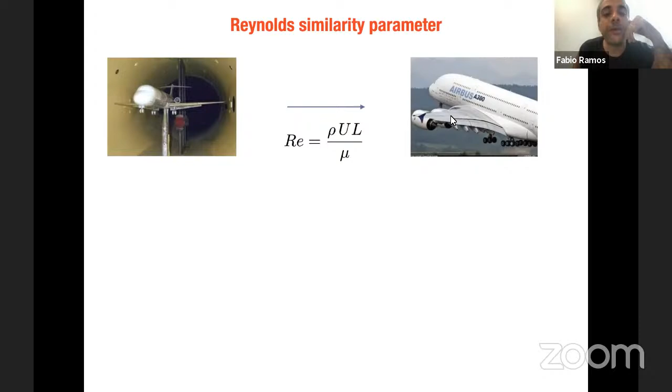And of course, as mathematicians, you know that you can normalize the Navier-Stokes equation in such a way that, in the dimensionless variables, the 1 over Reynolds shows up here. And it's natural to believe that when Reynolds is really, really high, then the effects of the Laplacian, the diffusive effects, is small.

And then you'd approach something similar to Euler, something more inertial than diffusive. But that's...

elusive, because if you're working with incompressible flows, you know that you have non-local behaviors. And especially if you are in the presence of boundaries, working with the more used boundary condition, the no-slip boundary condition, u equals 0, you know that you cannot really ignore this effect.

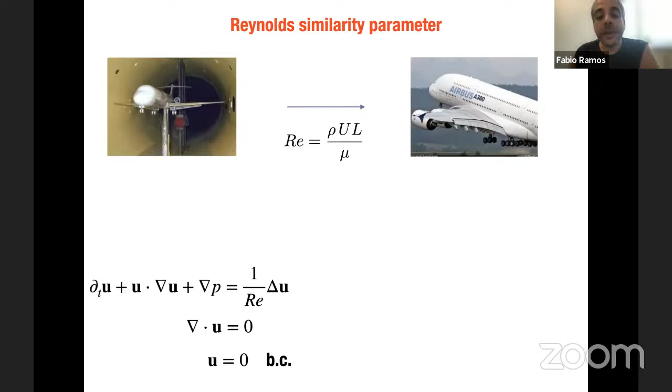This is a picture from a simulation of Lee, Moser, and Malaya. It shows that the velocity profile, the colors are related to the velocity profile intensity and velocity fluctuations. You see that near the wall, the physical behavior is very different than the core region.

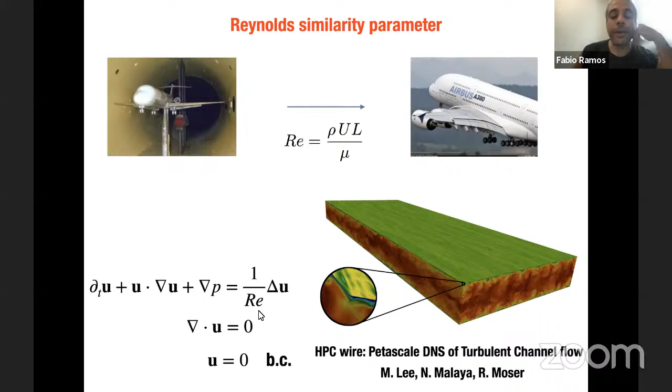And this kind of thing is the reason that you cannot really ignore it, cannot take the limit straight. You have to be very careful.

The Reynolds number, as you know, is the control parameter of turbulence. For a small Reynolds number, you have some laminar flows, and then you increase the Reynolds number, you see some transition. The transition can be seen through structure changes.

And then you have this transition to turbulence. People used to think of two types of flow, laminar and turbulent. That's it. Once you reach turbulence, you have the turbulence world, one single world, and you just have to deal with that world.

So here are just some orders of magnitude. A whale at 10 meters per second is 300 million Reynolds. Duck flying is 300,000. Human swimming is 10,000. It's good to have this order of magnitude.

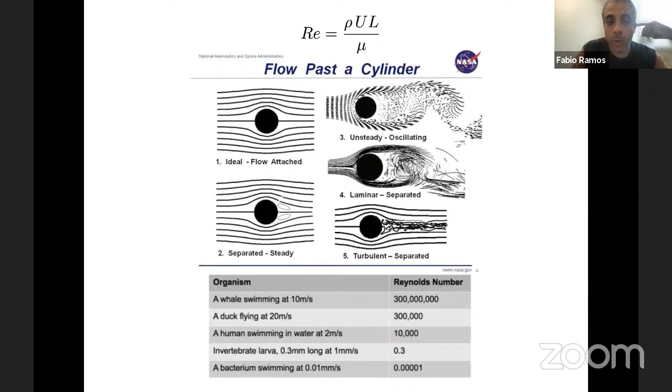So we are used to work either with the laminar flow or the turbulent flow, having these two worlds. But what I'm showing here today is that actually you should consider three worlds at least.

This is a work published last year in Physics of Fluids. We show that for a small Reynolds number, the friction factor, I'll define everything here today, scales with 1 over Reynolds, and the wall shear stress scales with mu, u bar, which is the bulk velocity, over delta, the radius of the pipe. And this wall shear stress yields this friction factor.

Then you have some transition to turbulence, and the wall shear stress scales with rho, u bulk, u eta, where u eta is the Kolmogorov velocity. The friction can be written as this ratio of Kolmogorov velocity to the bulk velocity, and this gives the Blasius range, the one over Reynolds to the 1/4.

People usually thought of the Blasius range as some empirical correlation, not very physical or mathematical. But recently we learned that there is some physics behind this scaling.

And then there's some crisis here, some other transition, a late transition, and then you have this transition to another scaling where the wall shear stress scales with rho, U bulk, and UM, where UM is the mesolayer velocity.

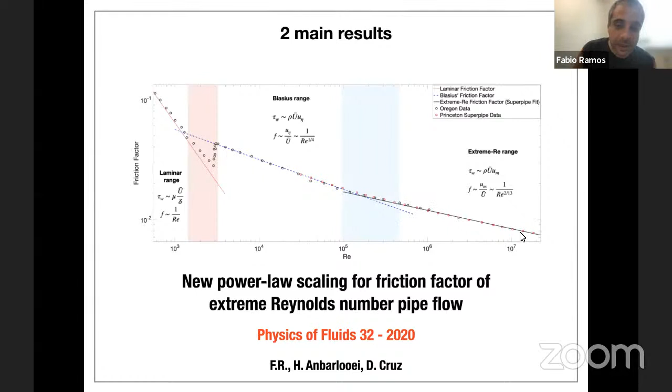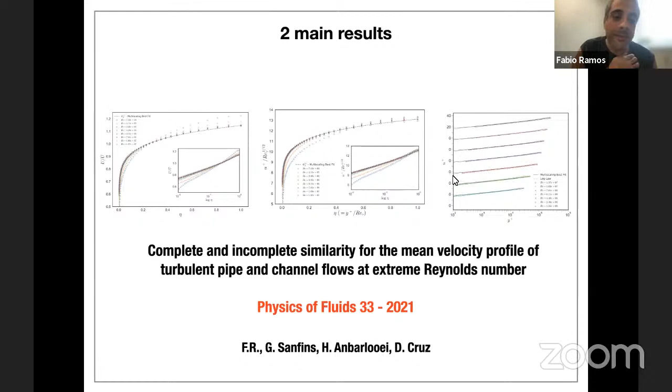And the other result is some more corroboration that this is true, that you have a secondary transition to turbulence. So when Reynolds is very, very large, we will show that there is a transition, that the mean velocity profile collapses into one singular self-similar profile, when you scale with the bulk coordinates. And this will be related to some incomplete similarity notion, which is not very discussed in the Western literature, but the Russians know very well. And then you can move to the usual wall scaling of the mean velocity profile. I'll define everything here.

Okay, so I'll start advertising this very nice book by Barenblatt, Scaling. So much of the concepts I will discuss here, not in the context of fluids, it's there. There's some in the fluids also there.

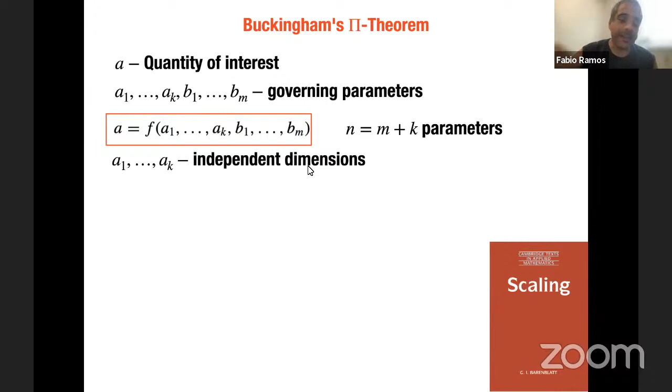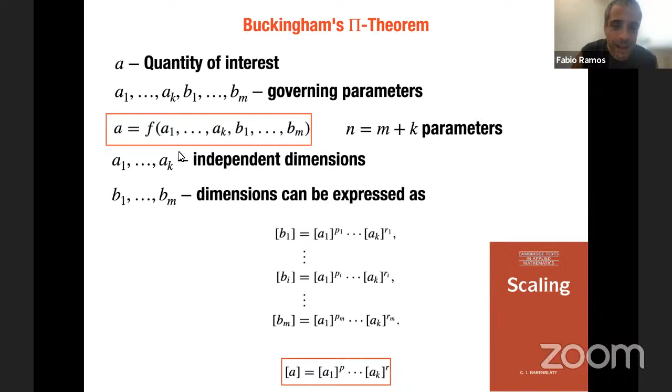So I'll start with the Buckingham pi theorem. If you have a physical quantity of interest, A, and some governing parameters, such that A is a function of these parameters, you have n parameters, but you divide these parameters such that the A's have independent dimensions, like mass, time, mass over length, stuff like that. But the B's, they have dependent dimensions. The dimensions of B can be expressed as products of powers of the dimensions of A, as well as the quantity of interest itself. So the A1 to Ak are the independent ones, they have independent dimensions.

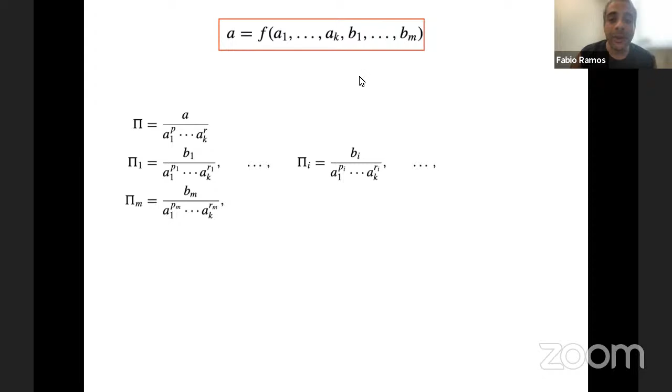So what the Buckingham pi theorem says is that if you have a physical relationship like this, you can normalize these variables. The A's you can normalize, the B's you can also normalize, such that you have these dimensionless parameters, and you have some generalized homogeneity property. This is modeling 101.

So you can always write this physical function F like that, as you take the A's out, and you have only the dimensionless parameters inside the phi, and then you can rewrite the physical law in dimensionless variables. So this is the pi theorem. You can always write a physical law in a dimensionless form, which is obvious. So this is Buckingham's pi theorem.

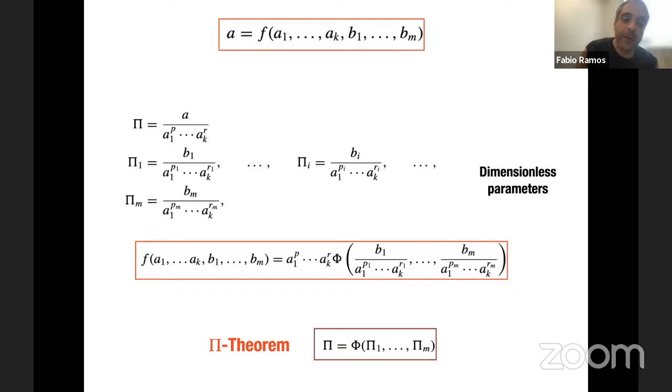The Buckingham pi theorem yields some similarity group of transformations such that you are free to multiply the independent parameters by positive numbers, capital A's. And if you change accordingly the dependent parameters and the physical quantity of interest, then the generalized homogeneity still holds. So you have this invariance through this K parameter group. So you're free to choose units, if you change things accordingly.

Let's go to the friction factor of fluids. So you have a flow flowing through a pipe, and I'm considering that I'm far from the inlet and the outlet, and this is statistically stationary, and this flow is driven by a pressure drop. The pressure here is higher than here. So the dimensions of pressure drop are like this: mass, length, time. The bulk velocity like this, pipe diameter, density, dynamic viscosity.

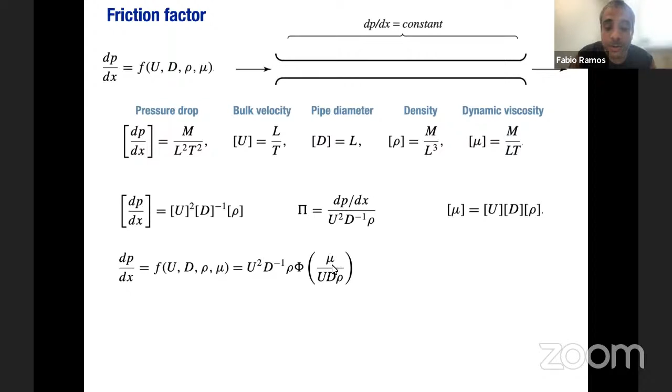You can rewrite the dimensions of the pressure gradient like this, so that you can form a dimensionless parameter like that. The dimensions of mu can be written like this, so that by the Buckingham pi theorem, the pressure gradient, using the generalized homogeneity, you can take out these guys and have just a function of this dimensionless parameter. And this dimensionless parameter is actually 1 over Reynolds. So this is Reynolds showing up here, the Reynolds number.

So if you write this dimensionless quantity called the friction factor, we know that this friction factor is a function of Reynolds. The friction factor is the single most important quantity in engineering applications in fluid mechanics. That's what determines the design of piping systems in several applications. So it's really, really important to understand the friction factor for different flows.

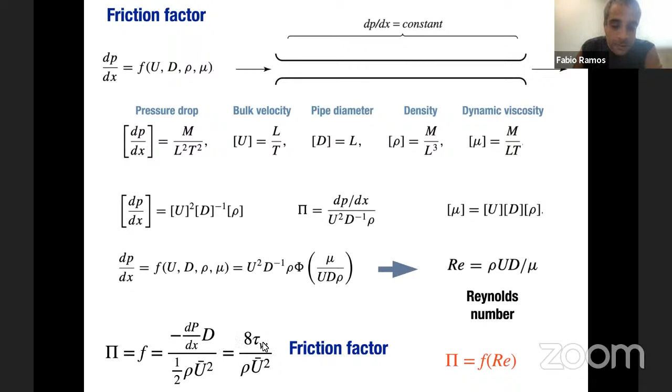Because it's very important, people know a lot about that. This tau W shows up here - this is the wall shear stress. I will show now how it appears in the friction factor formulation.

Let's assume you have a channel flow driven by a pressure gradient. You have a constant pressure gradient if you have statistical stationary solutions. This is the total shear stress, this is the viscous stress, this is the Reynolds stress. In the fluid mechanics literature, people work a lot with these stresses.

But what is really important for our work is to consider the full second law of Newton - Newtonian mechanics. So you're not dealing with the stress itself, but with the gradients of stress. When you write this, this is the axial mean momentum equation. This is valid all over the channel, and this has dimensions of force, so this is balance of force.

So this is the viscous force, the force that comes from viscous imbalances, from diffusive imbalance. This is the force generated by Reynolds stress imbalance. And these forces are balanced by the pressure gradient force.

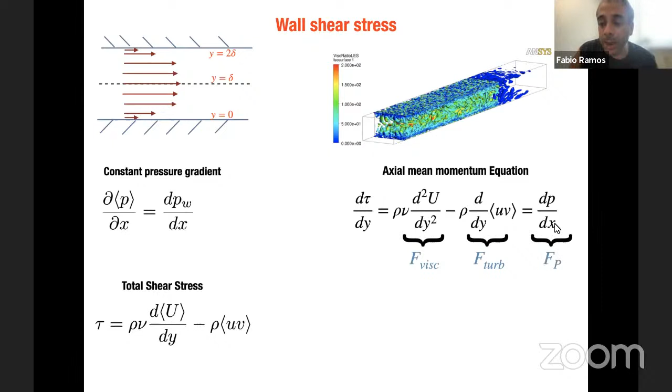If you integrate, then you know that the total shear stress at y, the distance from the bottom wall - this is y - has this linear relationship, and this coefficient here is the wall shear stress, the shear stress at the wall. At the wall, this is 0, so it's just the viscous stress at the wall.

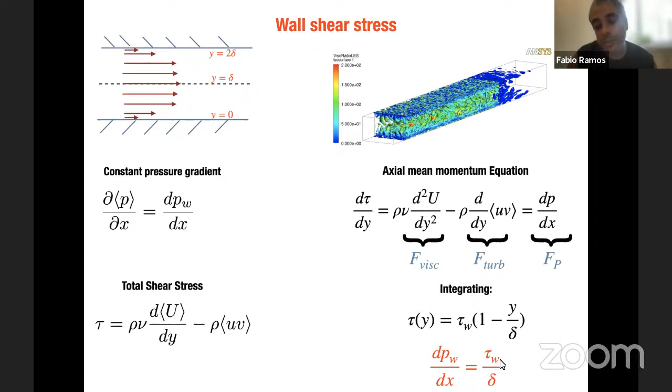And then using this relationship, you can prove easily that the pressure gradient is actually the wall shear stress over delta. That's the relationship between pressure gradient and wall shear stress. So to define a pipe flow driven by a pressure gradient, you have to define either the pressure gradient itself or the wall shear stress - that's enough, one replaces the other.

So that's why you have that the friction factor can be written like this with the pressure gradient or the wall shear stress. That's the definition of friction factor.

Already in 1911, Blasius assumed some special power law form for the mean velocity profile, and he showed by experiments that this friction factor scales like 1 over Reynolds to the 1/4. But after some range, after 10 to the power 5, Blasius correlation is not valid anymore - there's a limit for this law. And people always thought that the Blasius correlation is more like an empirical correlation with no physics behind it.

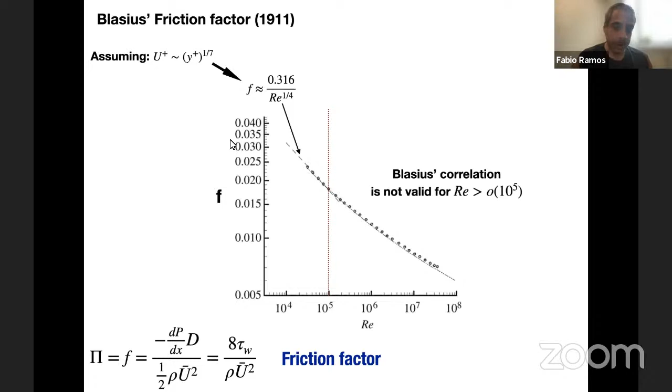In the 30s, about 19, 20 years after Blasius, Nikuradse did many experiments with smooth pipes, showing that really Blasius is no longer valid after 10 to the power 5.

But he also did many experiments with rough pipes. And depending on the roughness element size, the friction factor follows Blasius, but then there's a crisis, and then the friction factor goes to some constant. So when people discuss singular limits in fluid mechanics, a place where people really should look is rough pipes - you do have this constant friction, something happens that becomes constant.

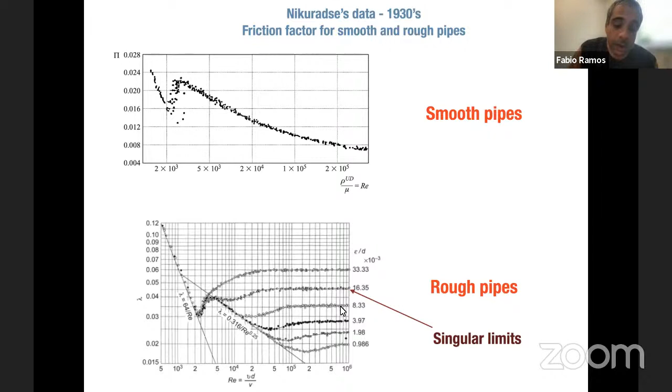Okay, so this is all about friction factor. Let's take a look here at some visualization of the turbulent channel flow by these guys from KAIST, from Korea. This is a really nice simulation. This is not very high Reynolds number, it's still in the Blasius range.

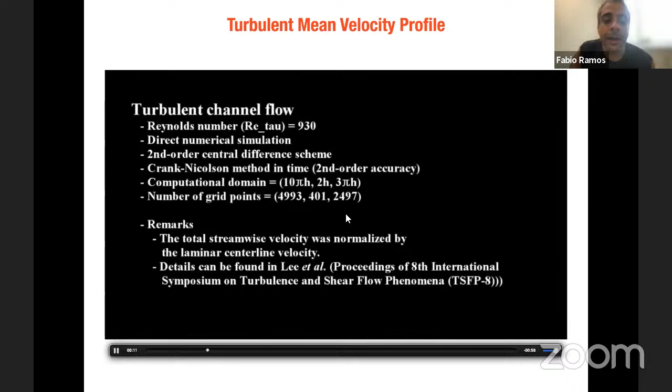And the velocity, the colors are normalized by the center line velocity, so you see that it's very fast here in the center line. Near the wall, this blue showing that is very slow, the velocity field. Of course, it's U equals 0 at the boundary, and then there's a transition layer.

This green area - take a look here at 0.5, halfway. It seems that some guys come from up and go down, down from the bottom, go up. You see some circulations here, you see some vortex.

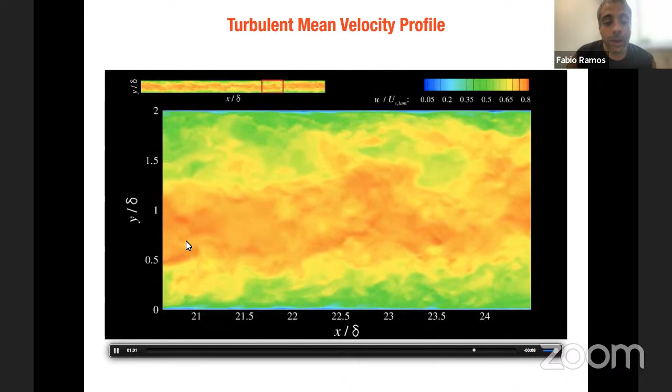So this is the usual thing that when you think about pipe flows, channel flows, you have this core region, you have the wall region, you have some intermediate range region. That's how people usually think of these pipe flows, so you have these different domains of the flow.

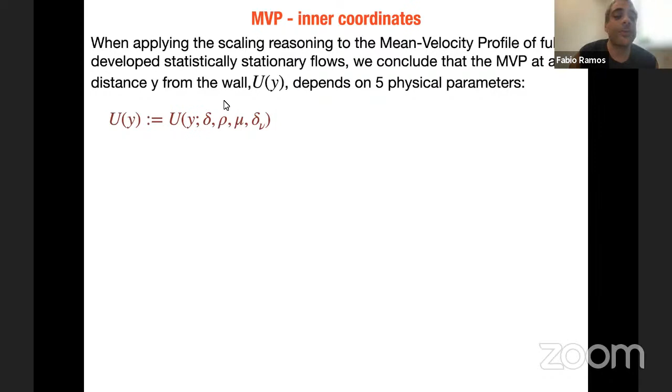So let's take a look at scaling of the mean velocity profile. The mean velocity profile is actually dependent on the pipe radius or half of the channel height, the density, the viscosity, and this quantity that I call delta nu. This delta nu is mu over rho over u tau, and u tau - this is the wall viscous length scale, the length scale that you should use in your rule to see things near the wall.

This u tau is the friction velocity, and you can form it with the wall shear stress, the square root of wall shear stress over rho. Remember, wall shear stress and pressure drop go hand in hand. So if you have pressure drop, you have wall shear stress, and then you have u tau, and you have delta nu. I could put here pressure gradient, u tau, or delta nu. I decided to put delta nu because it will be very important.

This idea comes from Prandtl, more than 100 years ago. He said, let's normalize the distance from the wall with delta nu. Let's look at using this wall unit delta nu, this is the y plus, and the velocity you should scale with u tau, the friction velocity. So these are the inner coordinates, the wall coordinates - the truth should reveal itself by looking with these glasses, right?

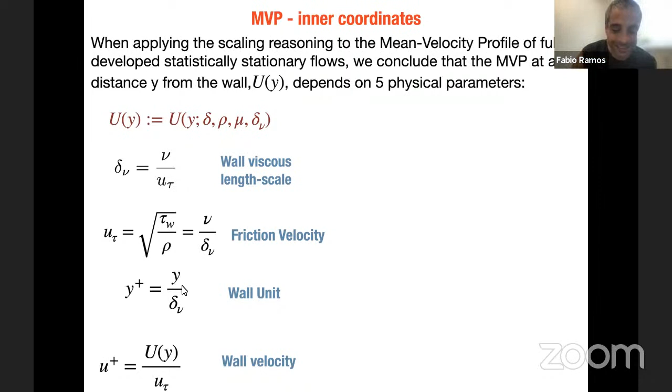This is what Prandtl thought. So this is the semi-log plot of u plus against y plus, and you see there's a linear region here. In the log, the linear looks funny, but it's a linear region. This u plus equals y plus, that's by definition of these coordinates. Then there's a region where there's a log law, some intermediate region that people call the log law region. People already knew you have some wall region, intermediate region, and core region, so that was natural. But the log law comes - this comes earlier - and then u plus is a function of y plus.

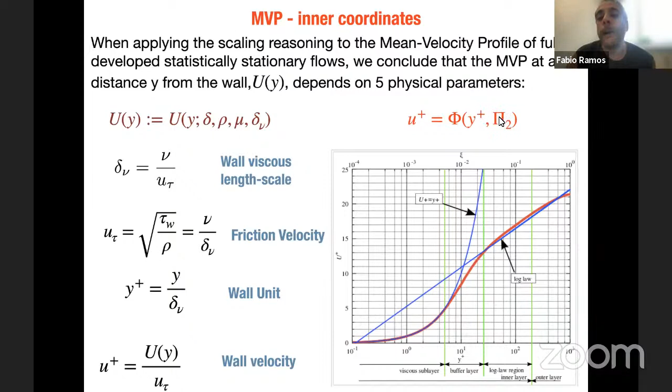But by the Buckingham pi theorem, you have the right to use another dimensionless parameter, pi 2, right? And it's open to discussion.

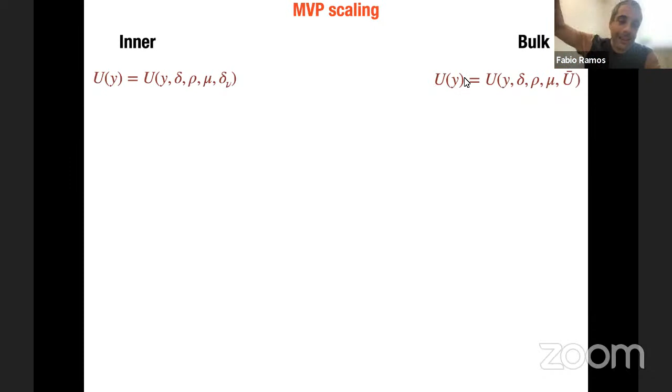So the mean velocity profile scaling - you have to look at two worlds, the inner world close to the wall and the bulk region, far from the wall, near the center line. You should scale in the inner region with y, delta, rho, mu, and delta nu. And in the bulk region, you should actually use the bulk velocity itself. Why not? This is the average. This is funky because these depend on this, but everything is coupled here anyway.

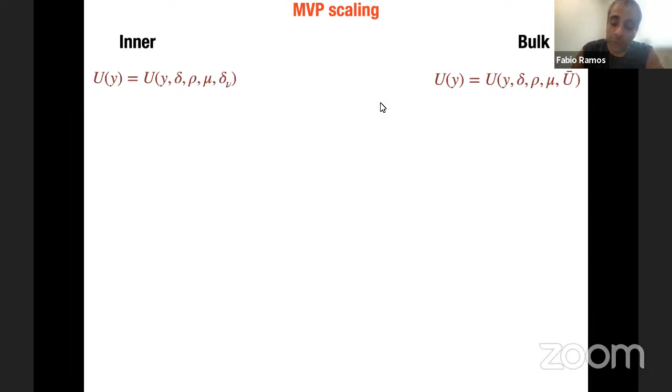You have different control parameters. To have a separation between the inner region and the bulk region, it's relevant to consider this friction Reynolds number - this is delta over delta nu, the pipe radius over the viscous length scale near the wall. If this ratio is really, really large, you can expect a separation of a center line world and a wall world. So if this friction Reynolds number is very large, you do expect some separation, some intermediate region.

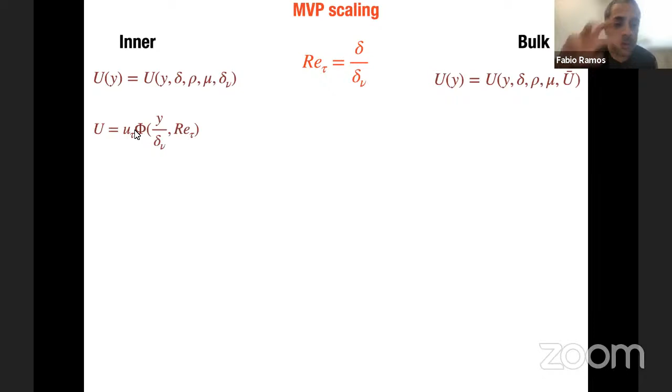By Buckingham's pi theorem, you can rewrite this with the U tau. Remember, U tau is some combination of mu, rho, tau w, and delta nu. So the U tau goes out, and then you have these two control parameters. You could also write like this, y over delta nu, and here y over delta. This is another dimensionless parameter - it could be written like that.

In the bulk region, the natural way of writing this is to take the U bar out and have this dimensionless parameter and the Reynolds parameter. You can form Reynolds here, but you cannot form Reynolds tau - you cannot form friction from these quantities.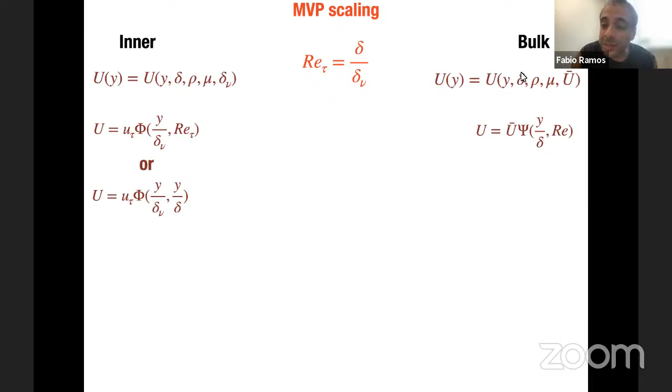The way to relate to the bulk with the inner world is really through friction factor. When you define the friction factor, you can see that it's actually some constant times U tau squared over U bulk squared. So this U tau and U bulk are related to each other through friction. And the Reynolds tau and Reynolds are also related through friction. So friction is really important in going from the inner world to the bulk world.

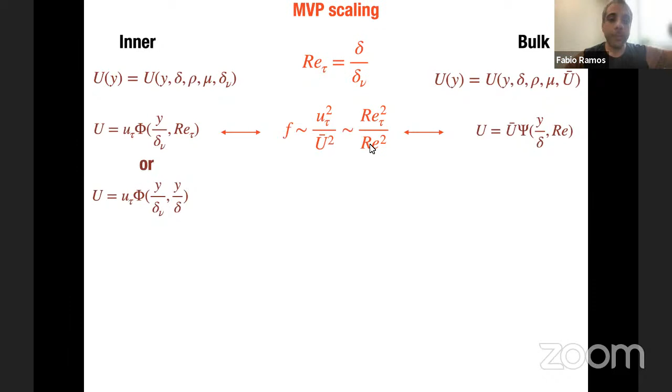Remember, for laminar flows you have a parabolic law, and for turbulent flows you have a more flattened region. For rough pipes, the profile can also be really flat, even with a smaller Reynolds number.

These laws depend on where you are in the pipe. If you're near the wall, you expect one law. If you're in the intermediate range, you expect another law. If you're in the bulk range, you expect another law. So this is not a universal profile for all of the pipe - you have to understand that. And for rough walls, it's even worse, because then you have to consider the roughness scaling as well.

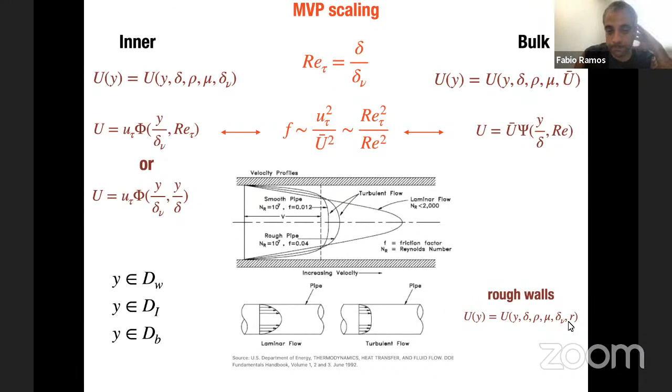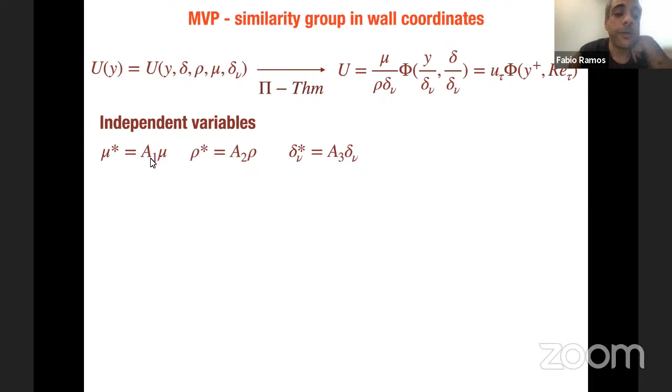In terms of the similarity groups, when you rewrite this using Buckingham's pi theorem, this is equivalent to saying you have this K-parameter group of transformations, such that if you're free to choose positive constants and change the viscosity, the density, and delta nu, the dependent variables are stuck—you have to use the same A3. The quantity of interest, the mean velocity profile, you have to change like that. Then you obtain a three-parameter group invariance, and you get the same law. So it's good to keep in mind that a pi theorem formulation is related to some K-parameter group symmetry.

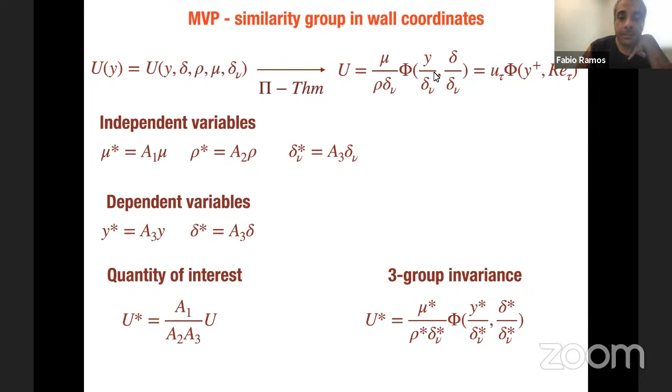Okay, the log law in the 1930s. Prandtl and von Karman realized—this argument is by Landau, but let's use it—that if you write the gradients of velocity and scale with U tau and Y, you have a phi. This is the Buckingham pi theorem for the gradients of velocity, or the mean velocity profile. If your Reynolds tau is really large, so that delta over delta nu is much larger, then you have an extensive range where Y is much larger than delta nu but much smaller than delta.

And then you expect some sort of complete similarity—I'll talk about this soon. In this range, this phi becomes constant, equal to 1 over K, this K being what people call the von Karman constant. And then if you integrate, you get the log law. That's a very cheap argument to get a log law.

If you use the log law and manipulate here the U-bulk and the friction factor from the mean velocity profile, you get a friction factor which has this logarithmic ugly face, which works very well. This is data from the Princeton super pipe, and it works very well.

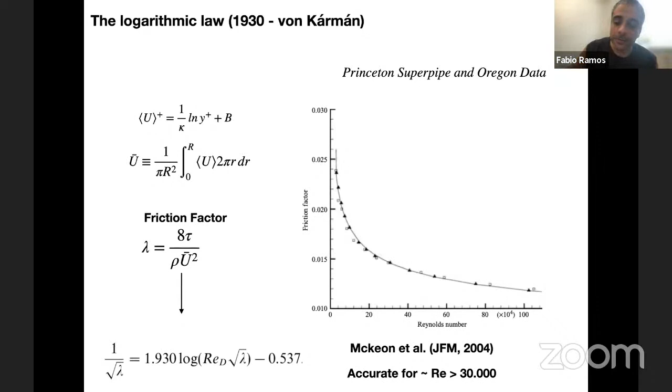But in 2006, Gioia and Chakraborty, now in Okinawa, proposed a wall shear stress closure, saying maybe let's close the wall shear stress related to the Reynolds stress in some wet layer—this is related to momentum exchange where the horizontal fluctuation is bulk velocity and the vertical fluctuation is Kolmogorov. If you put this scaling in, the friction factor becomes proportional to U Kolmogorov over U bulk, and using the K41 scaling, this is actually 1 over Reynolds to the 1/4.

People believed this might just be a coincidence, but my coworkers and I published a series of papers on non-Newtonian fluid flows. For an extensive family of non-Newtonian fluid flows, we obtained several friction factor formulas using the same rationale—we just change the Kolmogorov velocity depending on the rheology. So it seems this is true, this scaling works, there's real physics behind it. But for some reason, after some range, Blasius doesn't work anymore, and this scaling doesn't work anymore—something changed for very high Reynolds number.

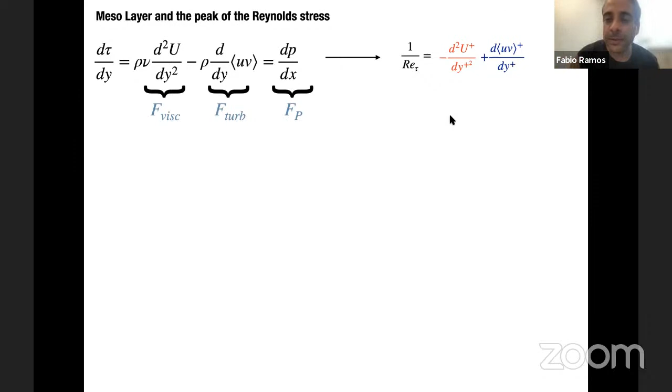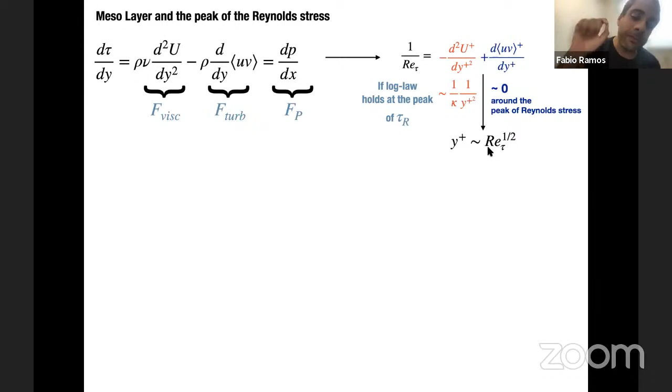At the peak of the Reynolds stress, if you believe that the log law is still valid there, we know the second derivative is 1 over y squared, since the derivative of log is 1 over y, and minus 1 over y squared. So this becomes 1 over y squared. At the peak, this is 0. So at the peak of Reynolds stress, if the log law is valid there, the location of the peak of Reynolds stress should be Reynolds tau half.

We believed our argument was new, but we found out that this is very well known. People get this relationship even without assuming the log law at the peak. So there are many works discussing the peak of the Reynolds stress.

But what's really important is if you look at the ratio of viscous force to turbulent force, viscous force is very important near the wall, balancing the turbulent force almost up to the peak of the Reynolds stress. After this third region, the viscous effects become very small. This is from a paper by Wei et al, in the Journal of Fluid Mechanics.

So somehow the effect of viscous force persists up to Reynolds tau half in these Y plus units. This is very different from the usual log law rationale, where people believe the viscous effect should stop at Y plus equals 100, 150, 300, some fixed number. But no, we are saying that actually it's Reynolds tau dependent.

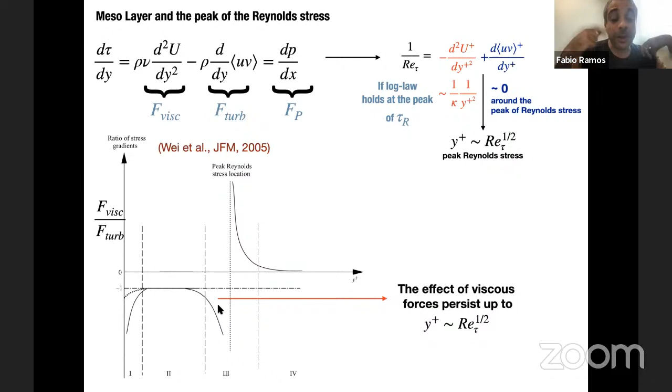So this layer, this mesolayer, is where the peak of Reynolds stress is, where you have lots of momentum exchange between the wall region and the bulk region. This is the mesoscaling, this y plus equals Reynolds tau half.

If you write in the normal units, multiplied by delta nu on both sides, actually this thing is the geometric mean of delta and delta nu. So you're saying that at the geometric mean of delta and delta nu, which is invariant, you have this very special place where you have lots of momentum exchanges, the peak of Reynolds stress.

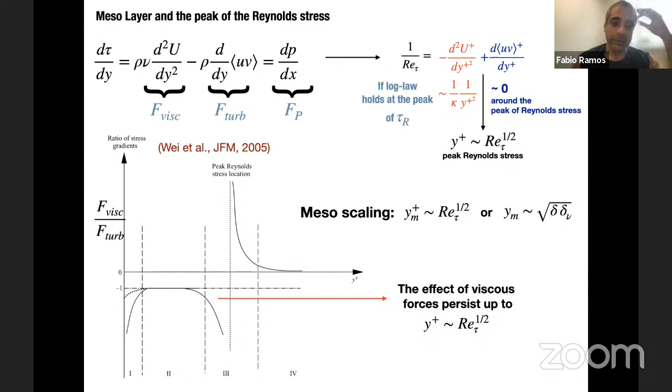And then we go through some arguments using Townsend's attached eddy hypothesis. What's important is that if you assume the wall shear stress has this momentum exchange scaling, from this fast part and this slow part, and u of y minus s is essentially zero, very small. The velocity here essentially scales with u bulk, and this Vm is some velocity fluctuation in the vertical direction.

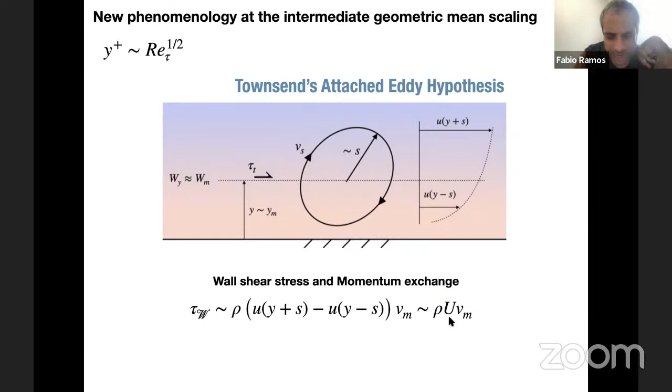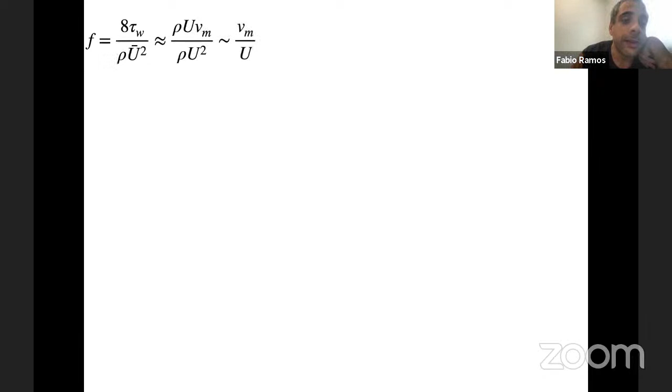So if we assume this, we can derive this expression for the friction. You put this in, and you have Vm over u, and here I'm using Kolmogorov K41 similarity. So somehow Vm scales as epsilon m to the 1/3, Lm to the 1/3. So you have this K41 similarity.

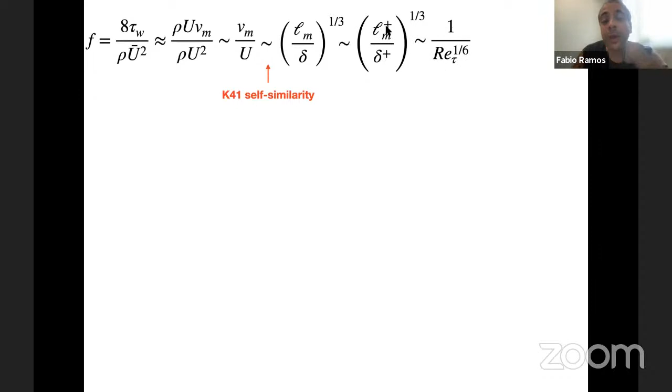I just divide by delta nu on both sides. Remember, this is 1 over Reynolds tau half, the location of the peak of Reynolds stress. So 1 over Reynolds tau half becomes 1 over Reynolds tau to the 1/6. And using this relationship between Reynolds tau and Reynolds through friction, you obtain 1 over Reynolds to the 2/13. So that's the scaling argument.

And then we went through some investigation of the mean velocity profile. So, what does this transition mean for the mean velocity profile? I don't have much more time.

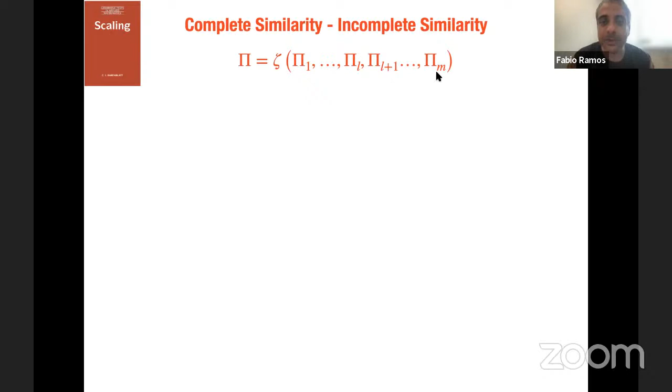Okay, so let's talk a little about complete similarity. The Buckingham Pi theorem says you can divide the dependent parameters from the independent parameters. This is already normalized, and it's common to consider that some of these parameters are very small or very large. In the limit of very small or very large parameters, you can just consider the non-asymptotic parameters. When this happens, when you can ignore, for example, you set Reynolds to infinity and you can ignore Reynolds, then we say that you have complete similarity in the remaining variables.

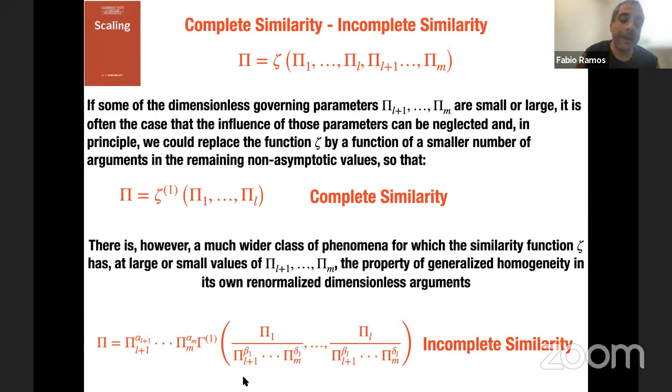That's the notion of complete similarity. This is usually rare in physics. What you have more frequently is the notion of incomplete similarity, where you cannot just ignore this guy, but you can renormalize. You can use pi 1 to pi L, but you have to normalize by the remaining parameters and take those remaining parameters out. So you have to normalize in its own normalized variable. That's why I call these renormalized parameters. When this happens, we call it incomplete similarity in the remaining parameters. This is related to some renormalization group. Essentially, you have an additional group of invariance. The independent parameters remain the same, and you can play a little with some of the dependent parameters. So you have an additional invariance group, and we call this the renormalization group.

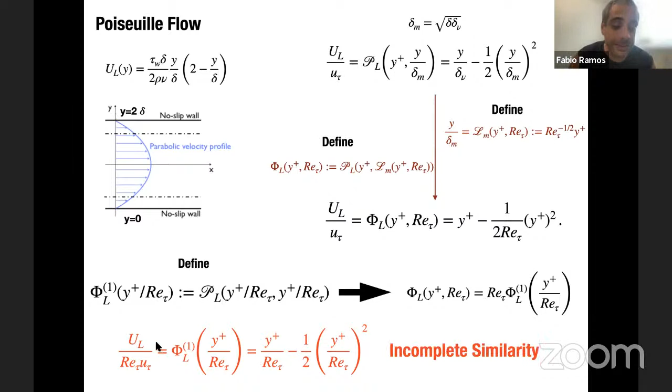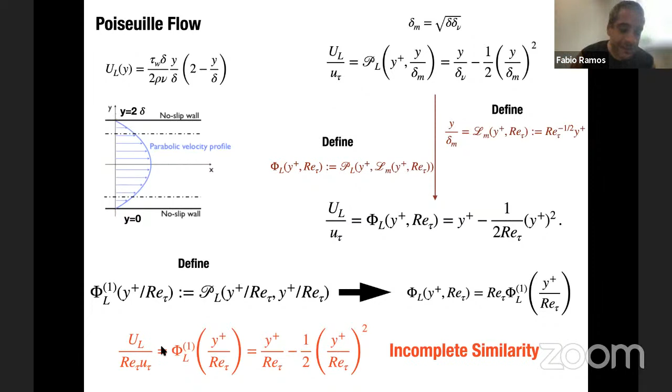And then if you define this other function, it doesn't matter much, it's just because I want to write this: the phi function, which appears here in the Poiseuille flow, can be written in this incomplete similarity way. This is a dimensionless parameter, and this is a dimensionless parameter, so I'm renormalizing things. The Poiseuille flow can be written in a renormalized version, in an incomplete similarity version like this. So you do not have similarity in U plus versus Y plus for the Poiseuille flow. But if you renormalize it, then you have similarity. So that works for laminar flows.

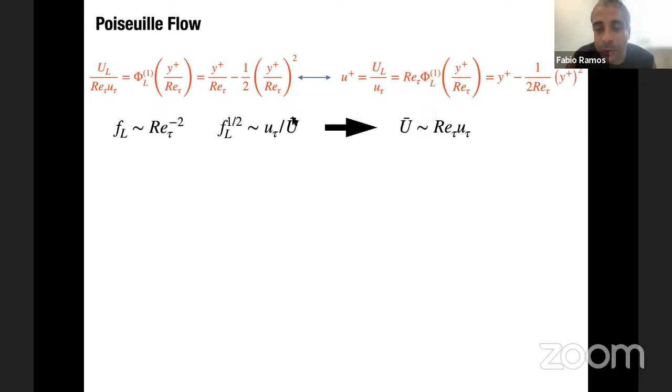So you have these relationships for Poiseuille flow. Now, the friction for Poiseuille depends on Reynolds tau minus 2. You have this relationship for friction, and then the bulk velocity is Reynolds tau times U tau. You see here this Reynolds tau is actually U bulk in disguise. For Poiseuille flows, you know that U bulk is 3 times U tau Reynolds tau. So this thing here, you could rewrite with U bulk.

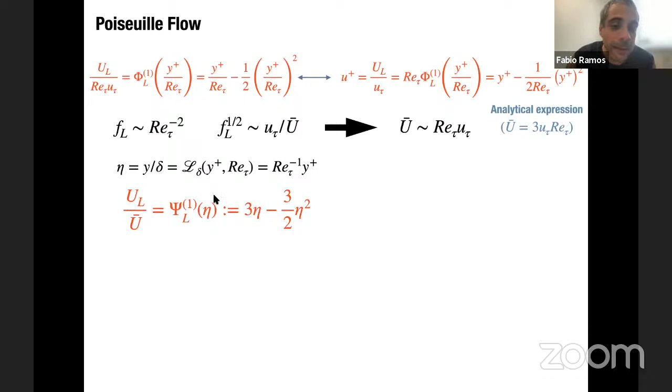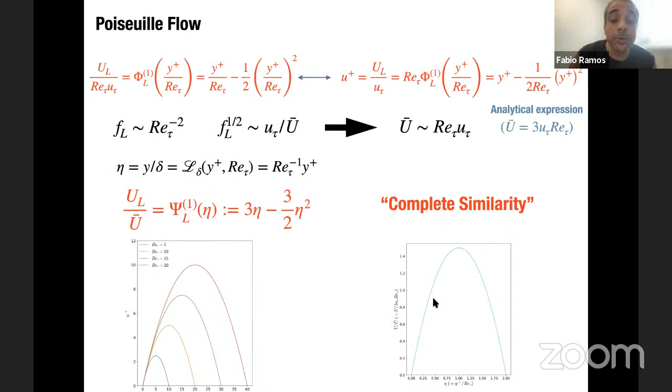And if you use eta as y over delta, then you can rewrite the solution of Poiseuille flow in bulk coordinates like this. You have complete similarity for the Poiseuille flow in bulk coordinates. So if you plot U plus versus y plus, you don't have similarity for Poiseuille flow. But if you write it in bulk coordinates or renormalized coordinates, you have one single profile. So it seems that you should be using this renormalized version or the bulk version to see the Poiseuille flow, and it's related to some renormalization group of invariance. I don't have much time.

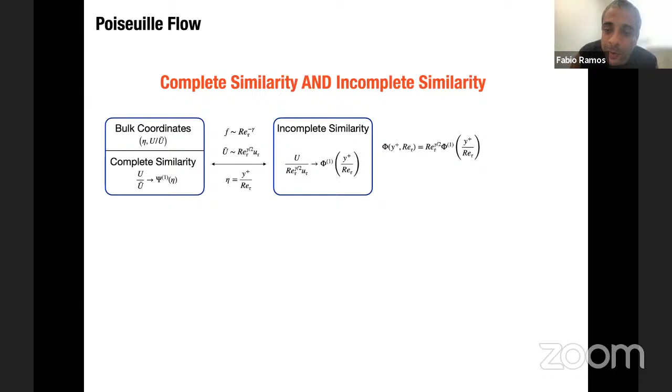So we've seen that if we use these bulk coordinates, you have complete similarity, and by using friction, you can relate this to some incomplete similarity. And if you multiply both sides by Reynolds tau gamma over 2, then you get U plus and Y plus. So using this relationship, you go from bulk coordinates, complete similarity, to incomplete similarity, to this U plus against Y plus.

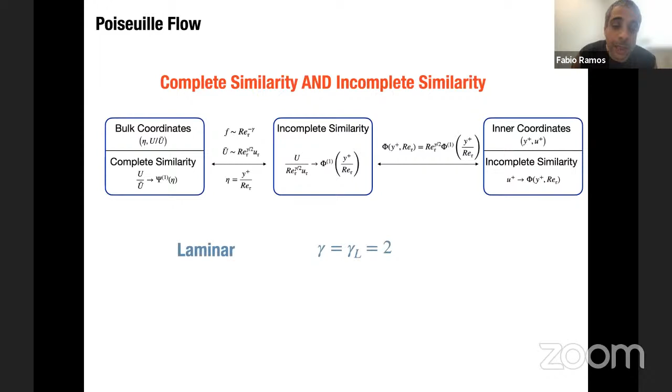These are all connected through friction relationships. Details can be found in the paper. So for laminar flow, the friction is 2. And for the extreme Reynolds range, what happens if I put the scaling of the friction here, if I put the minus 1/6 here? That's what it did.

And then you do have the renormalized asymptotics as well, right? Well, I don't have much time, so I just want to say that we went a step further and asked what this means for the U plus against Y plus coordinate that engineers are used to using.

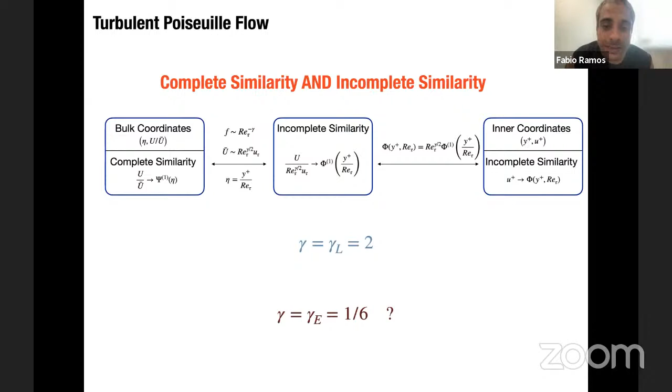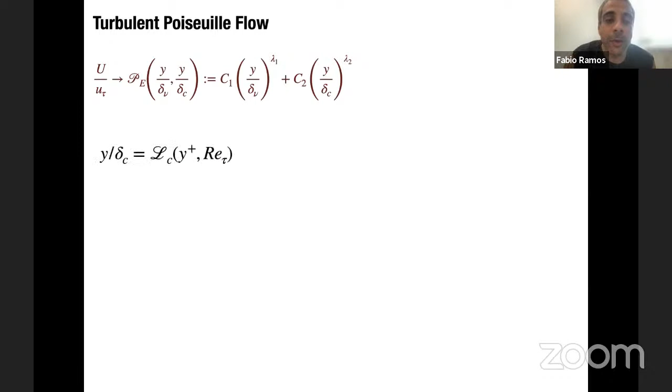So for Poiseuille flow, you have this polynomial, right? This was a parabola. We are trying to extend this idea. Instead of using a parabola, you have a polynomial, right? But what polynomial is this? So we proved that if you want incomplete similarity, like this, Reynolds tau alpha, Reynolds tau beta, you don't have much choice.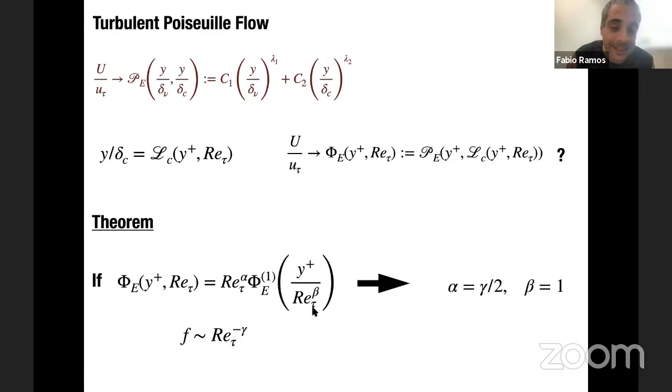This coefficient should be the coefficients that come from the friction, and this beta equals 1. But when you put beta equals 1, this is 1 over delta, this is eta. In other words, if you want incomplete similarity, you have to use the 1 over 12 here, and here it has to be 1 over delta, y over delta, right? And then we have to search for values of lambda, which is, what is lambda 1, right?

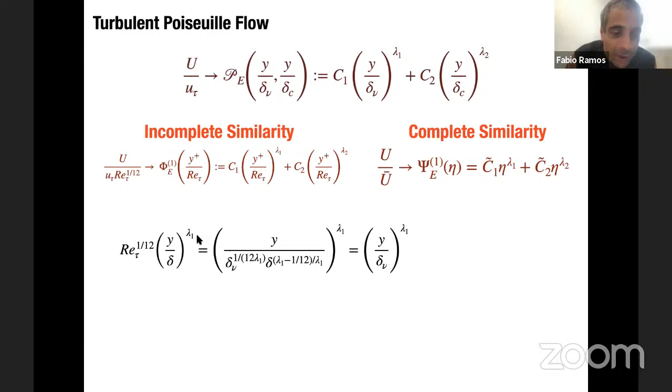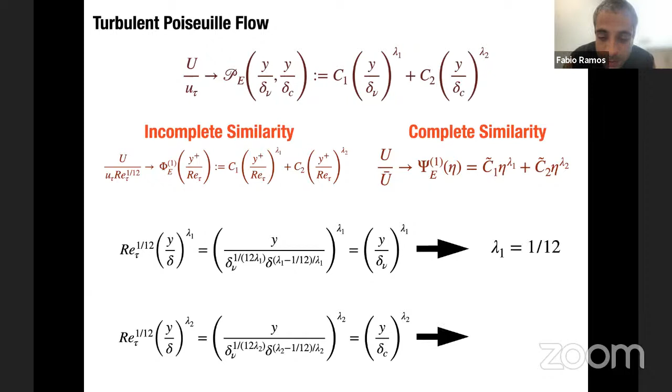So I'm looking for this lambda 1 for some proposal of polynomials, right? So if I rewrite this thing like this, and I want to use the delta nu here, the only way that I can do this is by choosing lambda 1 equals 1 over 12 here. And if I want to use this delta C, I'm free to choose. If I want to use here the mesolayer scaling, believe me, the only choice is 1/6.

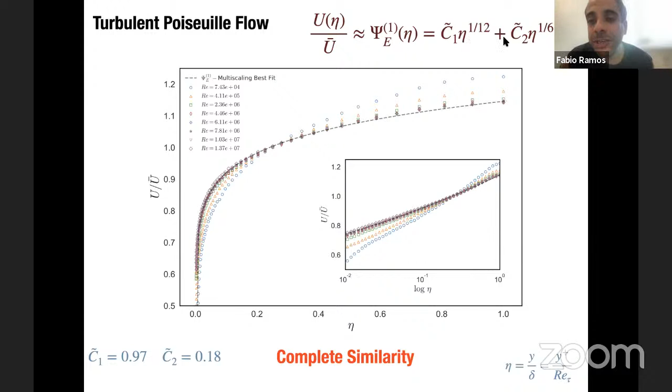So summing up, we propose some mean velocity profile fitting strategy using this 1/12, 1/6, and it works fine for the bulk velocity. The errors are very small, they converge to 0. And that's the same for the incomplete similarity, right? So you have some power law for this incomplete similarity. It's a nice fitting as well.

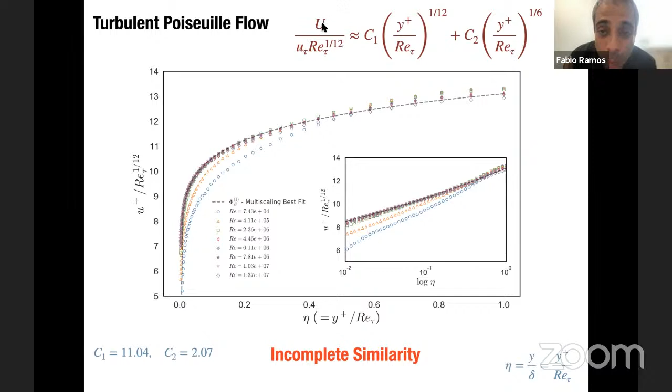But why are we doing this? Because we want to multiply both sides by Reynolds tau to the 1 over 12. Then you get U plus here against Y plus. So when you multiply by Reynolds tau 1 over 12, this is U plus and this is Y plus, but you have to pay some taxes here with the Reynolds tau. So people are searching for Reynolds tau independent power law formulas, but that's not possible.

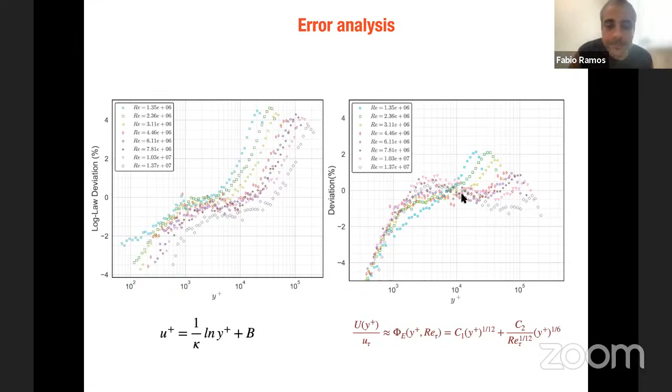Barenblatt had somehow argued in these lines. So for this U plus against Y plus, we propose to use this formula, and then it fits very well. We compare it with the log law from Prandtl. So this is the errors from the log law, this is the errors from our formula. The errors are good, smaller in some regions.

So our formula works. In summary, because we have very large experimental data for turbulent pipe flows, we were able to see that you have some secondary transition to turbulence.

We have some phenomenology linking the mesoscale with the new friction factor. It seems that the mean velocity profile has some sort of singular limit, some complete similarity in bulk coordinates. We linked this complete similarity to incomplete similarity, and used this incomplete similarity to propose some polynomial models in the classical inner coordinates. So this, I know it was a lot, but if you want to hear more about this, just send me an email.

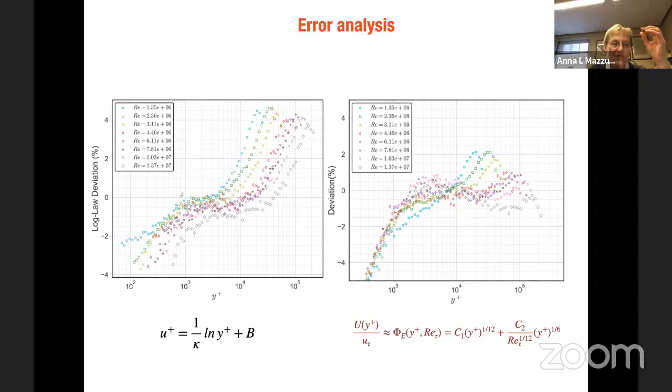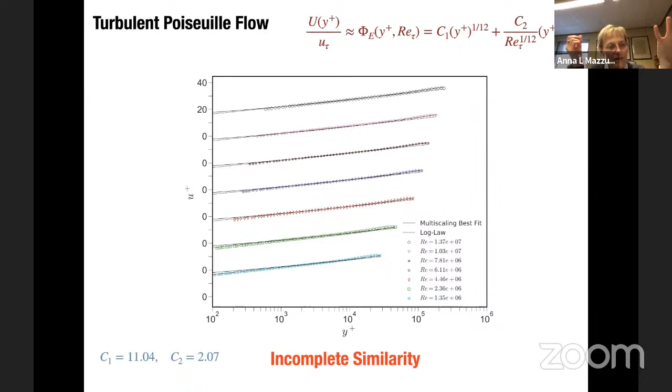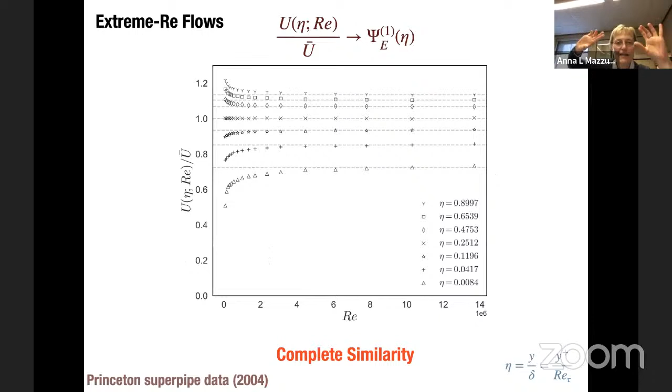So I have two questions, maybe they're very simple-minded, but I was trying to process what you were saying. The first one is, if you formally homogenize your inner layer, say in the pipe with the Poiseuille profile, do you get the scaling for Navier friction boundary conditions? Because if you have very oscillating boundaries and you homogenize them in the right regime, you get Navier. But here I'm thinking of homogenizing the layer, not the wall.

Okay, even formally, have people looked at that, thought of that? I don't think so. I don't know. I don't know the answer, and I haven't seen any reference concerning Poiseuille flows and homogenization and Navier boundary. But maybe Gabriela or Elena knows better. But no, I don't know.

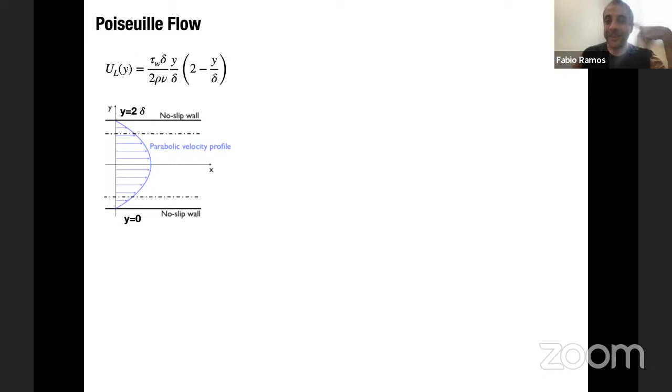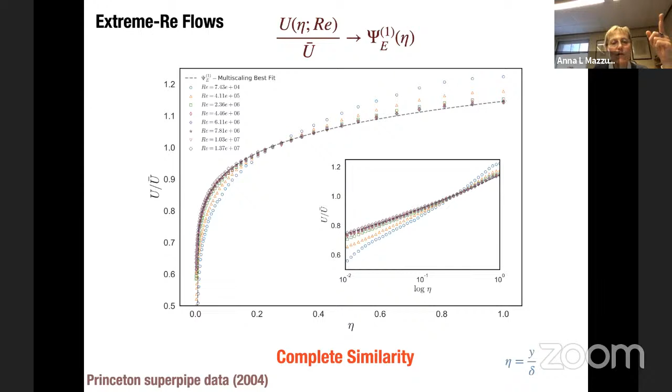My other question is, you mentioned non-Newtonian fluids and friction scaling for friction laws. Using Kolmogorov scaling, you get a certain friction law. But my question is, what about elastic turbulence for very low Reynolds numbers?

So for n lower than 1, you have what we call the shear thinning flows, so you have drag reducing properties. For a physicist or an engineer, the way they want to reduce friction in a flow is by adding polymers that have this shear thinning property - you have less friction. In the limit that n goes to 0, you would believe that you have the ultimate shear thinning flow.

But this goes to some limit, a well-posed limit - it goes to 1 over Reynolds to the 1/2. So you have this limit, and there's an associated mean velocity profile using the same theory. Surprisingly, it's a power law scaling with 1/3, the Onsager 1/3, the Kolmogorov 1/3. There's some weird stuff going on that I don't fully understand. When n goes to 0, the mean velocity profile becomes a 1/3 power law, and the friction becomes 1/2.